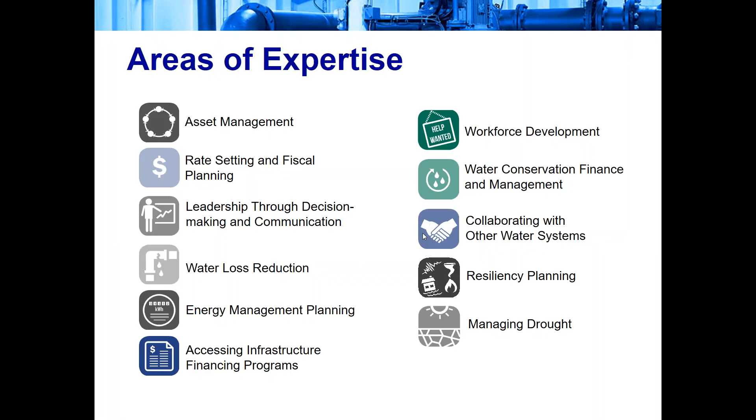Yeah. Well, thank you. Hopefully everybody can hear me, and we're going to get our screens transferred over. Is that looking good, Tess?

Okay. Well, thank you all. Just a little bit about myself. It's a pleasure to be speaking with you guys. Actually, as Tess said, I'm a career Fish and Wildlife Agency employee. Worked for the state of Texas as well as the state of Kansas, and then spent 16 years with the U.S. Fish and Wildlife Service in their headquarters in D.C. So I jumped at the chance. I'm a native Kansan and jumped at the chance to come back home to Kansas and get out of the craziness that's D.C.

There we go. Now we're getting advanced. So, yeah, I'm real excited, and to be honest with you guys, I'm real excited about this opportunity, the EFC network. Tess talked a little bit about it already, but as a former federal employee, I don't know of anything that we had similar in the Fish and Wildlife Service. We maybe did a little bit of similar type of technical assistance through our grants program, where we had some recognized experts that would work with the local folks, but to me, this is a great opportunity for you guys, and it's very proactive on the part of EPA to provide this type of training out to y'all free of charge and so forth and so on. As Tess already showed, these are some of the areas of expertise of the Environmental Finance Center Network.

If you haven't, I had not heard of us until I got hired on by Wichita State. It's a neat deal from my perspective.

EPA has an Environmental Finance Center in each of their regions, and we're university-based, providing a lot of technical assistance. You can see some of our specialties here. At Wichita State, we're known for asset management as well as finance and rates. So that's why we're here talking with you today about asset management.

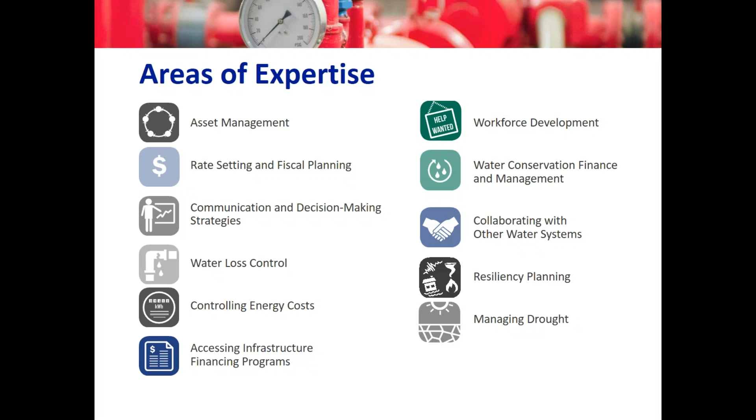So today's agenda, today's activities, I'm going to try and give you a quick overview on asset management and get you thinking about it, as well as get into some of the core components of asset management. Hopefully I won't bore you too much, particularly on the customer input part. That's one of my specific levels of interest.

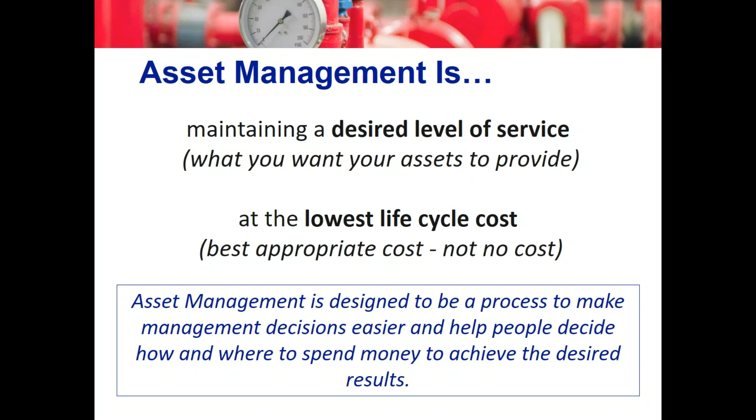So at the big picture, you've got a lot of things to consider when trying to run a utility effectively and efficiently, and you've got a lot of competing needs with limited resources. A good asset management plan is going to take these factors into consideration and help you or your organization make good, sound decisions on what should be funded.

So an asset management plan is going to look specifically at what your needs are and try to help you determine what the benefits are of a particular project, what the risks are of not doing the project, and the thing I really like is: what do your customers really want?

That is something this utility service industry has been kind of negligent about - or maybe not negligent, but a little lax in realizing that customers are a very important part of the process. Not only are they paying our bills, but it's important they're informed as to what it takes to provide water services and all the necessary treatments and expenses.

From my particular perspective, the more you get your customers educated and involved, the better off you're going to be as a utility.

Some other decision-making factors are going to be what financing is available, does the project meet a critical need, best expenditure of funds, and of course looking at the alternatives.

From my particular experience, I used to work in Kansas with Wildlife and Parks, and we used to be a comprehensive planning state, and these are some of the factors we were looking at. We made our employees submit this type of information every year as we were developing our internal budgets for some of our capital improvement projects.

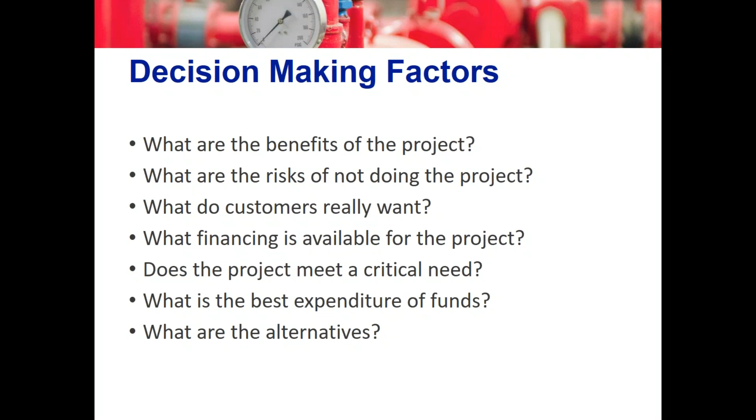So this particular guideline, or this particular slide, to me is very useful, and it's something you may be considering, or if you're not already implementing it throughout your budget process, this is something you might want to consider, because it gets kind of complicated running a utility. You're often faced with a lot of high-dollar, expensive repairs and maintenance that you need to figure out, and you don't know how to prioritize them.

So if you can come back to some of those questions, perhaps force you or your staff to take a hard look and answer some of those questions from the preceding slide, you can help filter out which of these projects are going to rise to the surface and be your highest priority.

From my particular example, I'm a native of the city of Topeka, our capital city in Kansas. It's a town of around 100,000, and last year they experienced about 1,000 water line breaks throughout the city. So if I was them and looking at my budget on this particular slide, pipe replacement may be where I'd want to place my money.

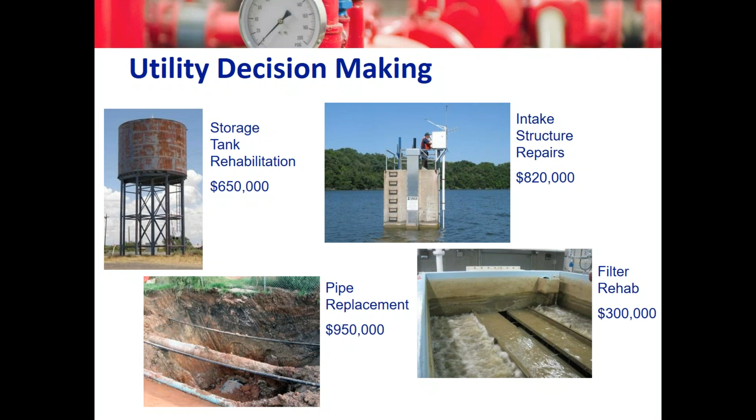But in reality, that particular example, they may actually have some more pressing needs to keep their water flowing. They can maybe replace the pipes as they need, but there may be something else, like the storage tank, that's the highest priority, and get funding for the pipeline replaced whenever they can. So if you go through that process and look at some of these issues, particular items are going to float to the top as what you need to be doing for good, wise use of your money.

Asset management planning, from my perspective, is pretty neat if you do it right. A lot of y'all on the webinar may be at the level where you're getting approached by contractors or consulting firms that want to do an asset management plan for you.

We go out and teach asset management planning throughout the state. One of our people that we teach with used to work here at the EFC, and she's since moved on to a different position, but before that she was working with one of our major engineering consulting firms here in the state, actually an international consulting firm. What she likes to point out is that yeah, her firm could come in and do a nice asset management plan for you, and it would be wonderful, state-of-the-art or top of the line.

But if you're not involving your staff in it, then it's just going to sit on the sideline and not get used. So to me, if your organization implements an asset management plan, it's neat because you need to rely on your staff. You're going to need to pick their brains, get their knowledge, get them engaged in the process, and in the end you're going to get a plan that's actually probably going to get implemented and used, and you're going to gain some of the knowledge of the entire workforce. To me, that's very, very critical in this whole concept of asset management.

Last week, just as an example, I think a lot of folks, particularly small systems, are finding that they think they have an asset management plan, but it frequently lies in the brain of their longtime operator. And that operator may or may not want to share that information to get it written down and shared with others, because the operator may be thinking that's job security in the long term, or maybe he's just swamped and doesn't get to it.

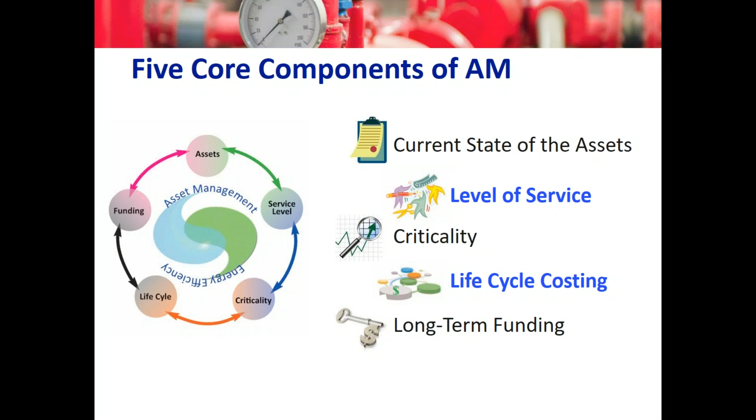And finally, the last component of asset management is to consider long-term funding. So with that, we'll jump in.

The first thing you need to do is start getting a state of your assets - learning what do I own, figure out what your system owns. Try to start getting that information collected and start easy. If you don't have an asset management plan already in place, we encourage folks, and your peers recommend, to start easy. If you're a wastewater utility, start with maybe counting the number of sewer manholes that you have in your system. Do something visible and just start easy and build from there.

If you're a public water supply and you've got fire hydrants and don't have a plan in place, start counting your fire hydrants and getting the location where they're at.

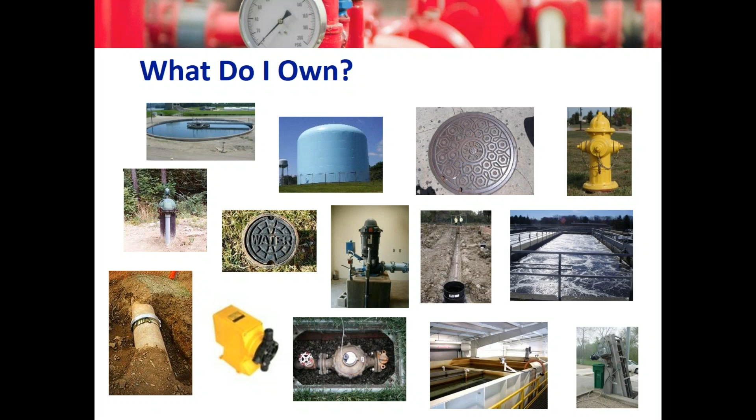I'll share an example of the city of Topeka - this is my hometown. This is some information they're sharing on their Facebook page - they've got an asset management plan in place, and it's a good system. Here's some information they're sharing with their constituents. They posed a question the day before asking: how many manhole lids do you think we have - true or false, do we have 20,000 manhole lids? So this is their response, and to me that's something you can do once you get an asset management plan in place - you can start sharing information with your constituents. As you can see, City of Topeka has 20,407 manhole lids.

So once you figure out what you have, then it's going to be important to know where your assets are. One of the things I really like to stress is you can start collecting your information and maybe just put it on an Excel spreadsheet. But if you get the chance, consider getting into a GIS database. GIS was just coming along back when I was initially in grad school in the 90s, but it's advanced so much in recent years, it's amazing to me. So start collecting the information and start getting it transferred to GIS systems if at all you have the chance.

Think about it - you may think of limitations where you don't have the chance, you may think 'I can't do it.' But I encourage you to think outside the box. One of the things we repeatedly stress is a lot of y'all probably have students going to college.

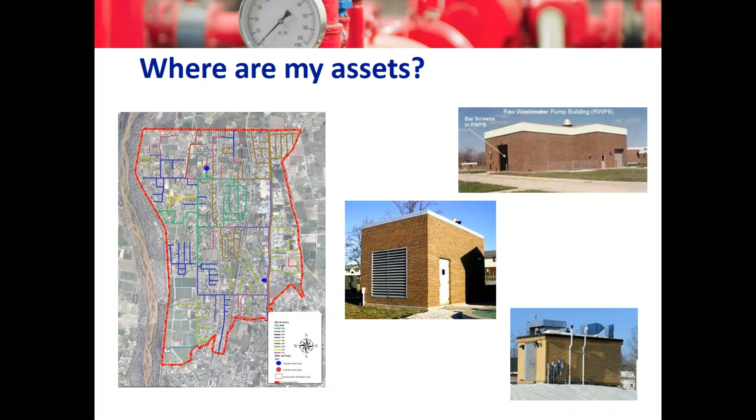So it's important to start knowing what assets you have and where they are, and then the next important thing to think about is the condition of your assets.

This particular slide is one we use in our training, and we like to get input from folks as they give their opinions. We particularly like asking, what's your opinion of the water supply pipe on the top left? It's interesting - we get some interesting feedback. Some folks say, hey, water's flowing, so it's great. Others say, hey, that's real poor quality, that needs to be replaced. But anyway, start to get a feel or an opinion as to what the conditions of your assets are, and that's some of the information you'll want to include as part of your asset management planning.

We suggest coming up with your own internal scale for your assets. It could be anything from a 1 to 5, a 1 to 10, or you can say fair, great, excellent. Whatever it is, whatever your staff agrees on - once you get staff buy-in on asset management planning and get their feedback, you can get their agreement on whatever the condition of an asset is and move forward.

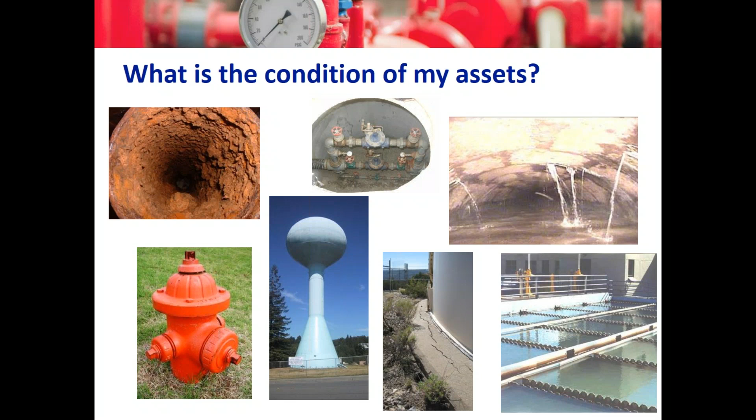Another example I like sharing is, once again, from the City of Topeka - this is their Facebook page from the utility department. They posed a question: does the City of Topeka have utility infrastructure from the 1880s? This is the response the following day: Yes, the City of Topeka does. They have infrastructure from the late 1800s - in this case, a sewer line underneath the main city. It really generated a lot of interest internally.

One of the things I did from afar was join a Facebook group called something like City of Topeka History Geeks. I shared their initial post and the response with that group, and it turned out a member of that Facebook group was one of the local reporters in the city. They ended up getting press coverage from the local newspaper, and I think maybe even the local TV.

That's the kind of stuff you can share once you get going with asset management planning. If you have social media support or a good communications department, you can start sharing that information with your customers, and it helps educate them as to what it takes to provide water and wastewater services in your city, and all the expenses involved.

I like to share with folks that before I took this position, I largely took water and wastewater services for granted. Boy, have I gotten my eyes opened and learned a bunch in the year and a half I've been here. I'm just amazed at what it takes to provide those services.

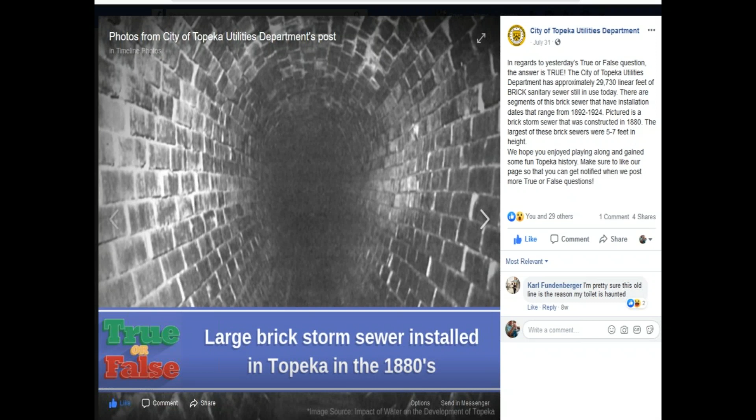I personally equate utility services a lot to the submarine fleet. I was up in the D.C. area for 16 years in my career and was around military folks there, so it seems very similar to me - the utilities are kind of like the submarine fleet. It's out there doing its job, doing its services, but no one really knows about it or appreciates it. That's some of the information I think you can share with your constituents once you start getting information on board and planning, getting going.

Thinking about this, still staying with your assets and what you have - another important thing you or your staff will want to know as you develop a plan is the remaining life of your assets. In some cases, if you're buying motors or have motors, you can rely on engineering estimates as to how long the motor should last.

You can always go back to some of your warranties and so on, but it's going to be important for you to start getting control of your assets, knowledge of your infrastructure, when it was installed, how much typical useful life is remaining, and start to think about that in planning terms as you prepare for future needed improvements.

To me, that's the most important thing with an asset management plan. I used to work in the budget shop here at the state level with the State Fish and Wildlife Agency, and it's important to keep that information flowing up so that your planners can help plan for the needed renovations and improvements you need.

So think about what is the remaining life of my assets. Then one of the other most important things becomes: what's the replacement value of my assets? What are you going to need? What's it going to cost to replace that motor, or to replace or rehab that water tower?

You need to start thinking about that, if you aren't already, in terms of planning, so that you make sure you have the funding available, and if you don't have it on hand, start looking for some of the funding sources.

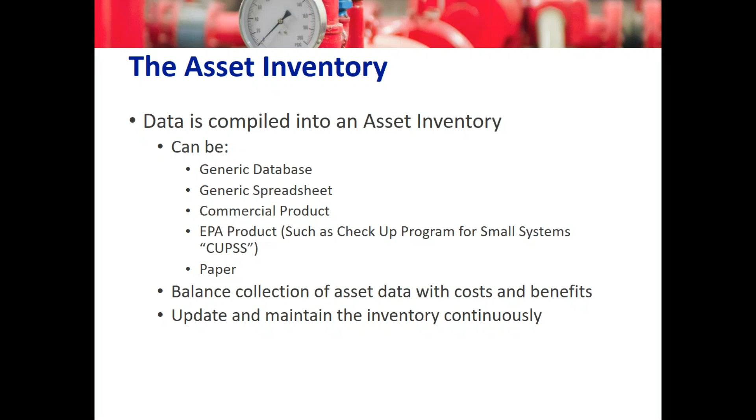We'd heard that it needed an upgrade, and EPA did fund some nice upgrades to it, so it's something you might think of and consider. I played around with it some here at Wichita State, and I think it's a good system and certainly worth promoting.

Now we'll switch over to the next core component of asset management: required level of service. That's the thing I could probably talk your leg off all day about, because that's my level of interest — one of my areas of expertise.

But it's very important, from my perspective, to keep communication flowing with your customers and get them involved in as many processes as you can. We get exposed to a ton of messages every day, and here are some ways you can keep information flowing to your customers — through bill stuffers, billboards, and classes.

Your CCR report, Consumer Confidence Report, is to me very, very critical. For a lot of systems, that's going to be the only outreach or education you really do with your constituents, and I really encourage folks to look at that and maybe improve upon it.

There are required things in EPA's documents as to what you need to include and report on, but I'd encourage you to make it very clear whether or not your system is actually in compliance. These are some of the things you can do if you're not already reaching out to your customers, and ways to start getting feedback from them on what they want.

If you feel comfortable with it, we encourage folks to involve your customers in as many of your processes internally as you can. In the next few slides, we'll talk about setting goals and measures for your utility, getting your customers involved and tracking that, letting them know. It will help them understand more about how your utility operates, and then perhaps use them to develop some measurable goals that you're going to track and report back to them.

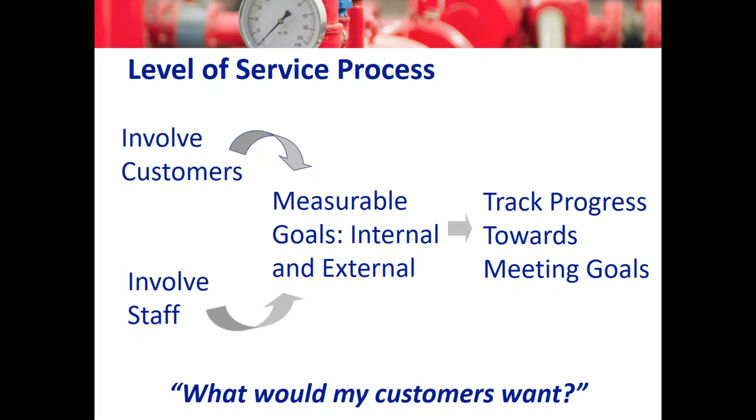If you do decide to set measures or goals for your utility, it's important to keep in mind that at minimum we must meet all regulatory requirements, but at the maximum, there may be services you want to provide, can provide, or are already providing that your customers don't know about.

The example here in the state of Kansas: we were asked by the state to go work with two water systems that were considering combining. Here in Kansas we have declining populations, particularly in our rural areas, and the state was hoping a rural water system would combine with a small city. So they had us go facilitate a meeting, and one of the key factors ended up being where they decided not to join resources and consolidate into one water supply plant.

The reason was the rural water folks did not soften their water, and their board members honestly said their cows don't care if the water is softened or not. The water system of this small community was actually softening the water, which is a big benefit for their customers. So the additional cost of the water softening ended up being why they didn't combine.

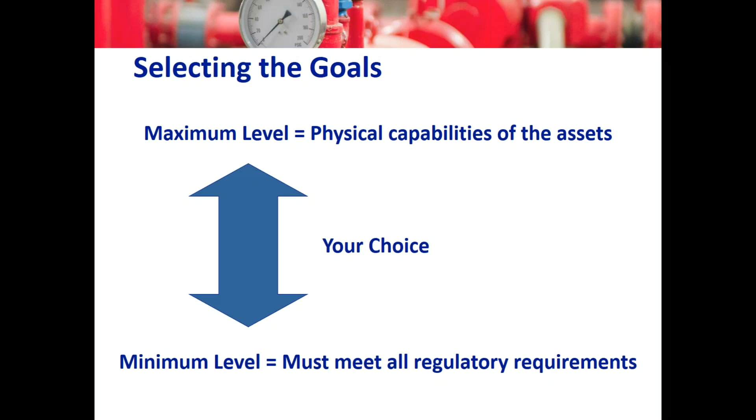It was great to see that both boards represented what their customers wanted and needed, and they knew about it. So it's neat to know that the organizations, in that case, knew what their customers wanted, had them involved in the process, and then ultimately chose not to combine resources as a result.

Just real quickly, we like to share some goals for you to think about. These are things that, as we talk about goals for your systems, we think are important, and things that you or your constituents may not know. Here in Kansas, a lot of our systems try to...

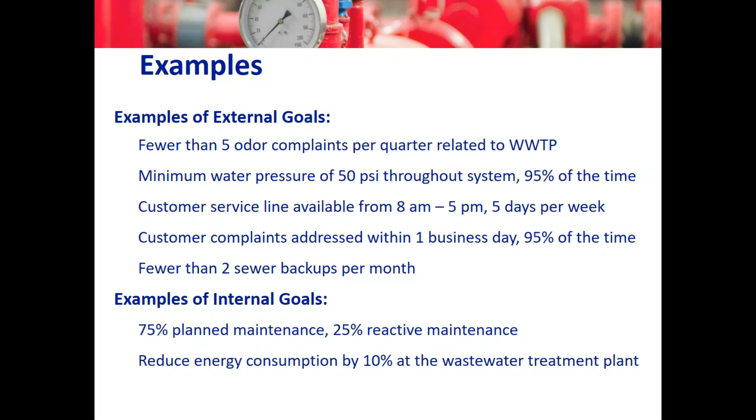...maintain water pressures around 50 PSI. But as we travel throughout the state, we're learning of systems that are actually maintaining 70 PSI, and we've even heard of one nearing 100, which the constituents may not understand all the costs associated with. So these are things that the more you educate your customers, the more you let them know what it takes to provide your services, the more they can have influence on the future operations of your organization, and that may help you factor in on some of your decisions about which pieces of infrastructure you replace and which are most important.

So we'll switch over next to the next important topic, which is going to be criticality and what components of your systems are critical to work with.

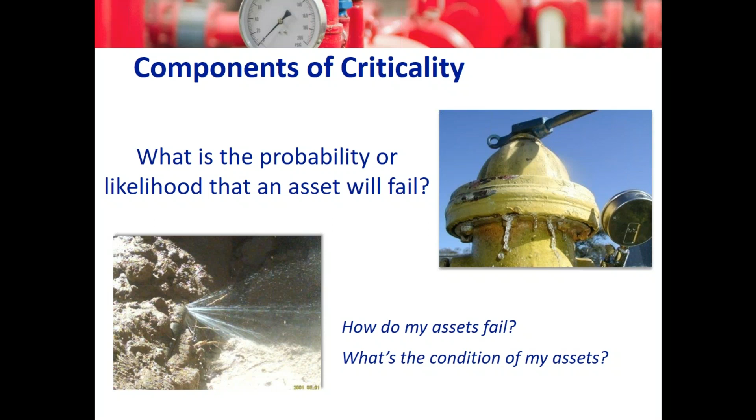Like I mentioned already, some parts of your system are going to be critical, and make sure you have backups if there's perhaps supporting hospitals, schools, so forth and so on. You're going to need to know internally what's the probability and what's the risk if an asset fails.

Here's some of the things that happens. You have water line breaks. You can put a lot of people out of service for at least a short term.

Are there legal, environmental, or social consequences if you're not maintaining your system properly? I should have an example here in a couple of slides from the state of Louisiana that will show some of you the importance of the decisions that you are making.

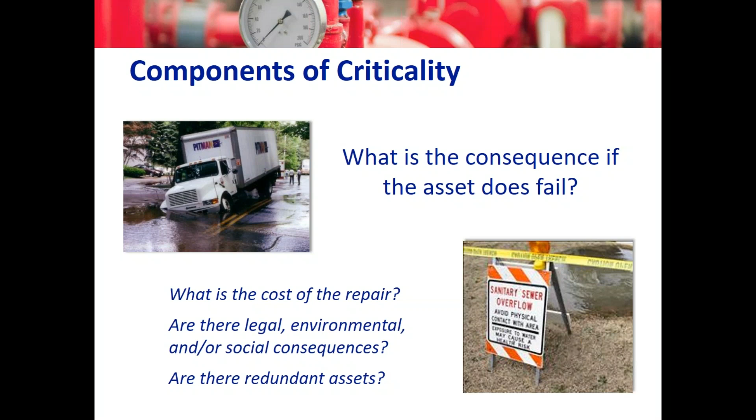So one of the things we encourage folks to do is graph out, graphically represent or look at your key infrastructure components and figure out what's the risk, the probability of failure, and what's the consequences of failure of a lot of your key pieces of equipment or infrastructure.

And if you end up determining that some of your infrastructure is high risk, if it goes out, if that pump or that system that's supporting the hospital or jail or prison goes out, then that's a high risk. You're affecting a lot of people, and that particular area needs to be more focused for you.

What we like to talk about is low risk. What's the risk of, say, a sewer line in a cul-de-sac that may fail, and 20 residents are affected out of a town of 100. Well, the probability of failure in that particular case is probably going to be low, and the consequences of failure are going to be pretty low.

So we encourage you to look through at all of your infrastructure and just try to give an honest assessment as to what's the likelihood that the piece of equipment will fail, and what's the consequences.

That will also be critical factors then for you to determine where to put some of those key financial resources that you have. Because as we all know, our resources are stretched financially, and it's going to be important for you to have a good, honest assessment as to where to put your money and what particular pieces of equipment rise to the top of the heap, the cream of the crop, for replacing.

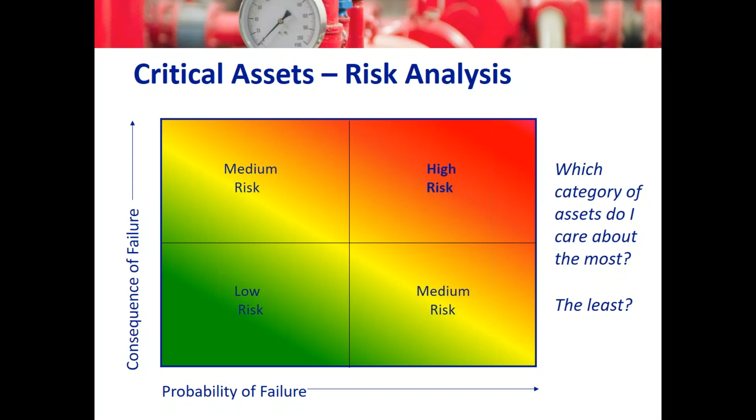We've talked a little bit next. We'll go on to the next key component of asset management, and that is life cycle costing.

There's a little bit of an art here and a little bit of a knack here, but it's important to know what are the ramifications, and particularly what are some of the things you need to consider with life cycle costing. As we talked about already, there may be legal ramifications, there may be environmental ramifications if you're not maintaining your equipment and it fails.

As a fisheries biologist, I can tell you there's been some very high-dollar fish kill mitigation efforts when folks weren't maintaining their systems, and you had large fish kills in some of your rivers and streams. Legal ramifications.

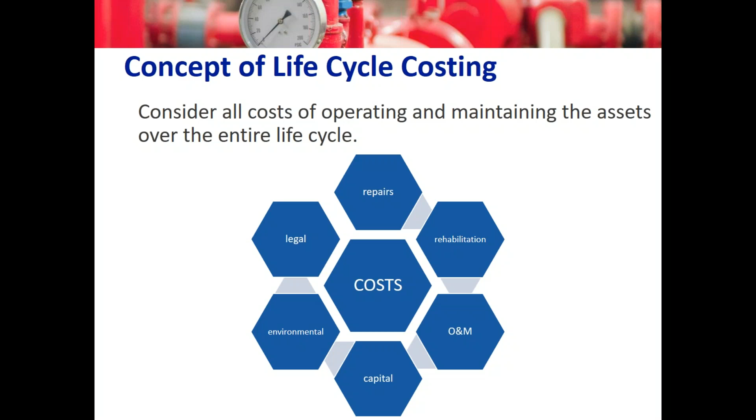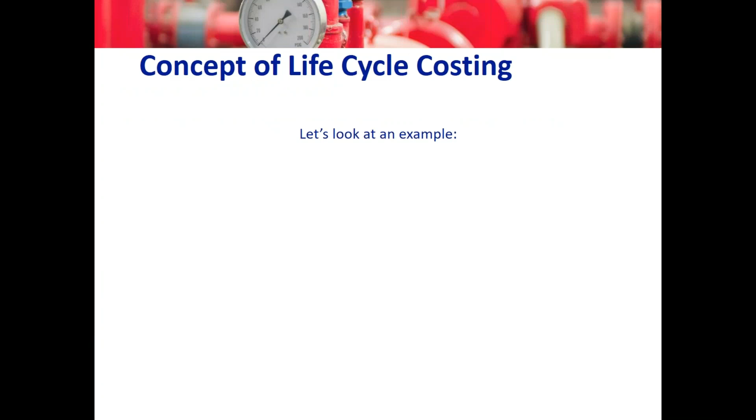So the concept of life cycle costing - we're going to look at a couple examples here. We've got two different ways to operate a system. On the left, we're putting more money into repair costs and trying to keep things maintained, and it looks like it's going to be more expensive. That may be the case in these days and times where folks really don't want to give the budgets needed to maintain things, and would prefer a budget more like the one on the right, where the initial costs are the same, but your boards and councils are not approving the maintenance funds. It may seem prudent, it may seem cheaper to go with that option, figuring things are just going to work, you don't need that much for repair costs.

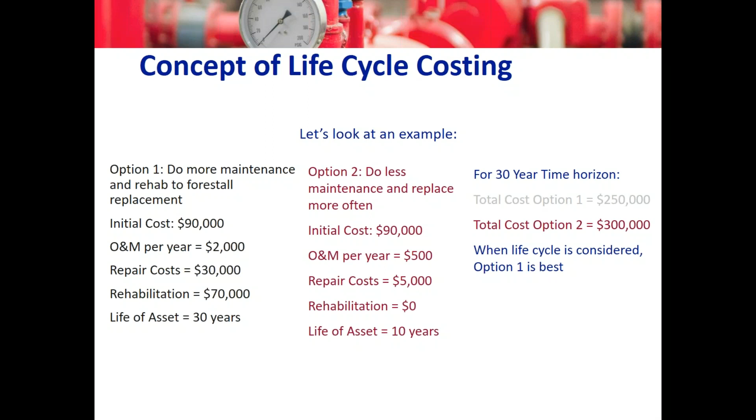But in the end, if you really factor things out, the cheaper option between those two is option one. We encourage folks - I see we have a mayor or two on the list of registered participants in today's class - think about that. Get honest feedback from utilities, or if you are the utility, make sure you're providing your board with good estimates as to what it takes to run your systems and what your repair costs are, and hopefully you'll get that approved by your board and council so your system keeps running well. I said option one is the most economical - you may have different results, but do this analysis and give your board and your utility the best answer.

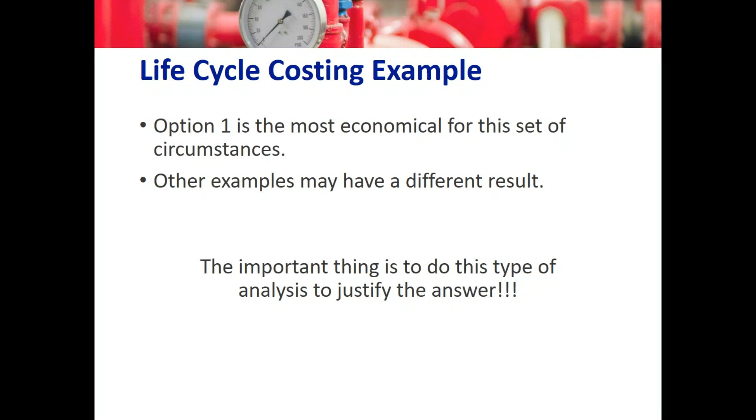Routine life cycle costing and O&M - it's important that routine and preventative maintenance can help extend the life of an asset quite a bit. There are neat things you can do to extend the life of your sewer lines and so on, just by doing good, proper maintenance - making sure the lines are televised so you can see root intrusions, making sure oil gets changed on key pieces of equipment, and so on. It's important that your maintenance dollars are being spent properly, and that your staff is out maintaining what needs to be done at the proper time. Once you get a good asset management plan in place, things will flow, and hopefully your maintenance schedules will be appropriate with a good end result.

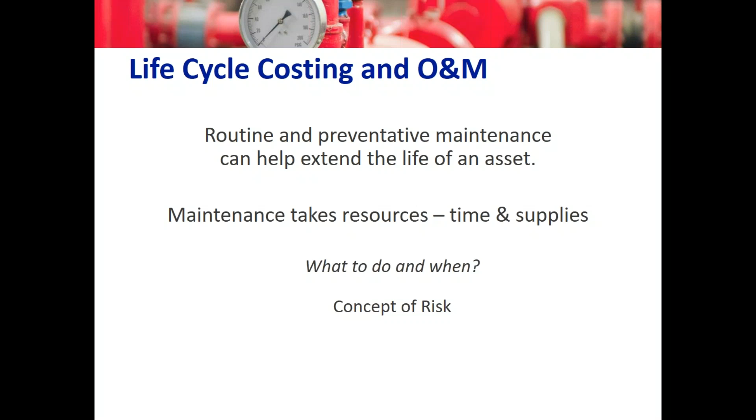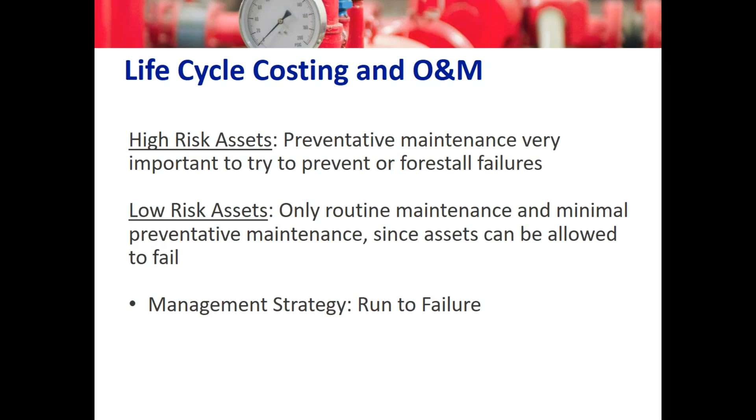Continuing with life cycle costing - think of your high risk assets. Make sure they're getting the preventive maintenance needed to try to prevent or forestall failures. Nothing's worse than when your key pump goes out and your whole city loses water pressure, or your key water supply line doesn't get maintained and breaks. Your whole city may nearly run out of water. We had a fellow EFC member on contract who was the ex-City of Wichita's main water treatment plant operator, and they had that happen - one main water supply line coming in from Cheney Reservoir north of town broke. During his tenure, he got it fixed just in the nick of time, but we almost had 300,000 people going without water in the city. So think about life cycle costing, and make sure your funds are devoted to the key pieces of equipment. Here are some good guidelines from your peers as to where your money should go with your maintenance budgets.

The recommendations of your peers are that extremely important, high-maintenance pieces of equipment are probably going to get about 45% of your budget. The less important things, like a water supply line to a cul-de-sac serving 12 to 15 people, are where you want to spend a little less of your maintenance funding. This slide is a good example from your peers of where you should be devoting funds to keep your system in good shape.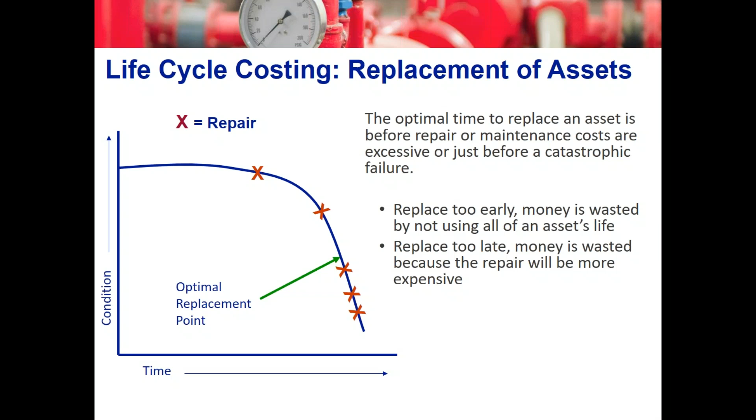At the field level, in actually implementing this, we recommend you do the best you can. Track your maintenance records, look at what maintenance costs and what it costs to replace things, and figure out whether to repair it one more time or go buy a new one. Keep that in mind.

Keep this type of graph in mind when deciding when to replace things. It's not possible to know the optimal time to replace every asset, but use your staff's knowledge and do the best that you can.

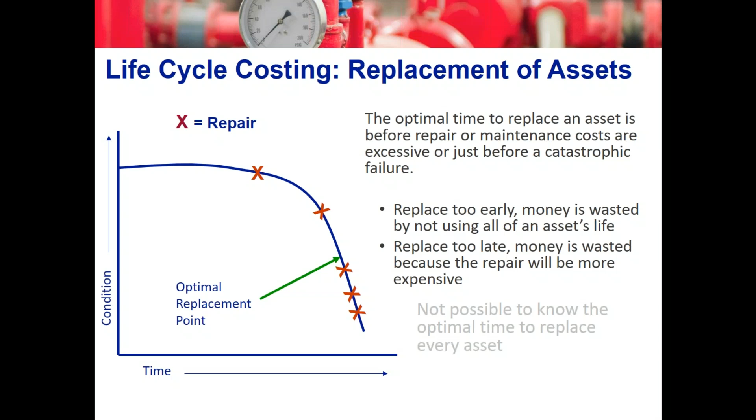The other thing we like to talk about, which I really like, is that a good asset management plan looking at all these factors helps with capital project planning and validation. Here at Wichita State, we teach a class or workshop on capital improvement planning, and if you don't already have one in place, we really encourage you to do it.

Looking at the participants, the larger utilities probably already have this in line, but some of the small ones may not. If you don't have a capital improvement plan already being developed, we really encourage you to do it.

With our small systems, often it's just the lead operator and the city clerk sitting down to hash things out: where are we at with this pump, when's it going to need replaced, what's it going to cost. You can start getting the core or foundation of a capital improvement plan on the books and start budgeting to make sure you have the funding available.

Ideally, a capital improvement plan looks 20 years out, but realistically it's more commonly a 5-year time frame. Keep that in mind, and remember that projects will bubble up to the top one year, and next year the priorities will be different.

But as long as you're thinking about what you need, what your systems need, and letting your boards and councils and everyone else know what you need, and trying to gain their support, it's important so that you can keep your system running with as little hiccups as possible and keep that service as reliable as possible.

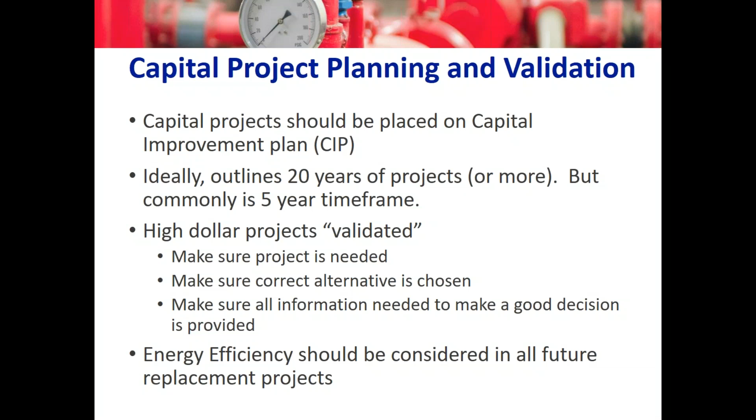From our perspective, we think, and we may be wrong, but we kind of assume energy efficiency has been really stressed for 10 years or so, so we figure a lot of utilities have made great advancements with it. But if you are considering energy efficiency, it is something to also factor into your asset management plans if possible.

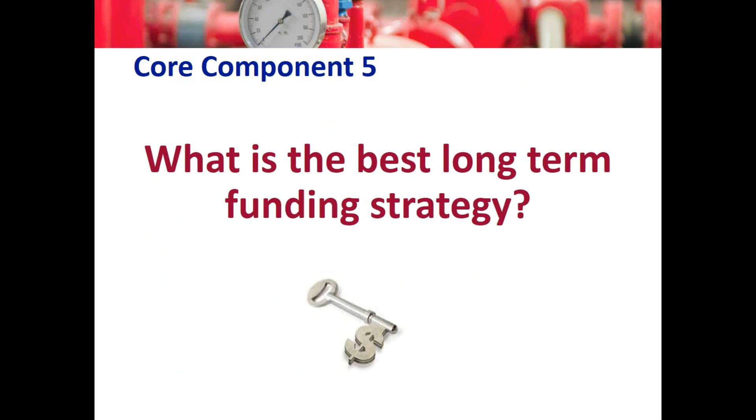And these are some of the things we talk about - typically the most important factor is customer rates. But we do from time to time hear of systems making quite a bit of money off customer fees with water shut-offs and shut-ons. Some water utilities will get a decent income that helps them on impact fees. And of course, most of your utilities will have the taxing ability, so that's a big advantage for you guys.

If you have not already done a recent water rate analysis, we really encourage you to do that, because that's another important component of asset management planning running on in the background. It's just taking an honest look at your financial resources and figuring out where to go next.

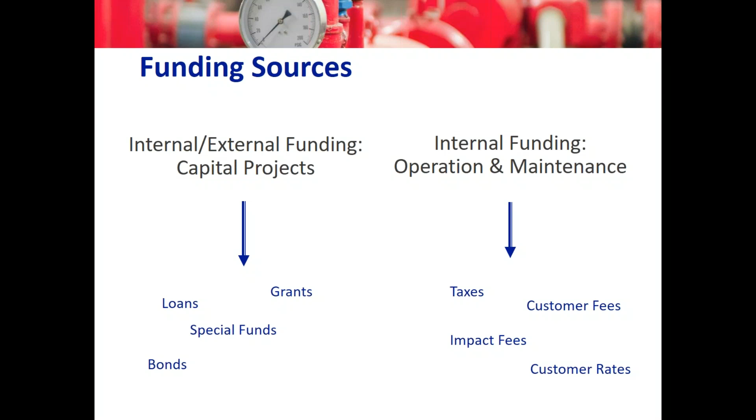That is something we can potentially provide here at the Wichita State EFC, as well as maybe some of your other EFCs. From my perspective, it's great because EPA is giving us funding, not limitless, but we do have funding where we can potentially go out and help small systems and provide various services. So rates are an important part of funding O&M, as we all know.

If possible, rates should be fair, equitable, and cover your full operating costs. What we're finding is that a lot of communities or water utilities haven't had water rate increases in a few years, so they're kind of getting behind. They need to do an honest evaluation of what it costs to provide their services, and also make sure they're getting some money stuck into the reserve accounts.

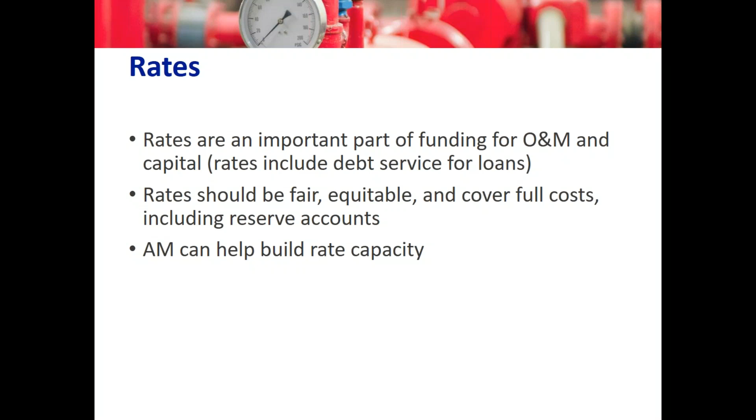So asset management is a strong tool to help you build that capacity. If you get a good asset management plan developed that lets you know what your future needs are versus your current ones, and factor all these things in together, you're going to have a good running system.

And to tie this all together a bit more, from my perspective it's always important to make sure you're reaching out to your customers and informing them as to what it takes to provide the services, as well as making sure you're reaching out to the board, your mayor, or whoever your oversight is. The more information you can provide those folks, the better off you are.

In the end, it's very important to get everyone on board so that you can get rate increases that are easily supported by everybody - by the elected officials, by the boards, by the customers. So the more information you put out with your constituents, the more information you have to generate that supports your decisions.

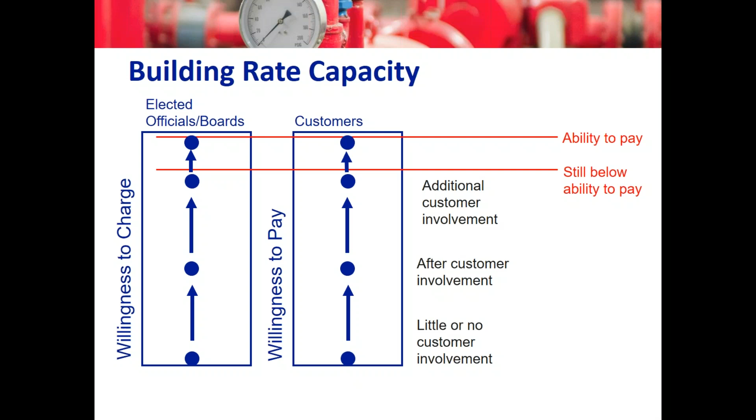The management plan saying, we've looked at our assets, these are things that are failing, these are things that we need, these are the services we want to provide. The more information and educated you have everybody involved, the more likely you are to gain support for what you need to run a well-running system.

And so finally, you're going to get to the asset management implementation. Some of you on the webinar may already be implementing asset management plans, a lot of you probably aren't. And the advice we have is where to start. We've already talked about it. Start anywhere. The main thing is to get started and try to build from there.

We all have time limitations and lots of responsibilities on the table, but try to take the time to get started, be it counting the manhole covers, be it counting your fire hydrants, whatever, wherever you can start. Start slow and start building, and then see where it leads you to.

In the end, we think you'll get a good system that will help make sure that you're providing the water and wastewater services reliably and as efficiently and effectively to your constituents as possible. So that's in general where we're at. You're going to see more and more interest and focus being placed on asset management as a result of the America's Water Infrastructure Act. Certainly in the state of Kansas, as well as throughout the country, you're going to see more and more focus on that. With that, we'll start wrapping up the presentation.

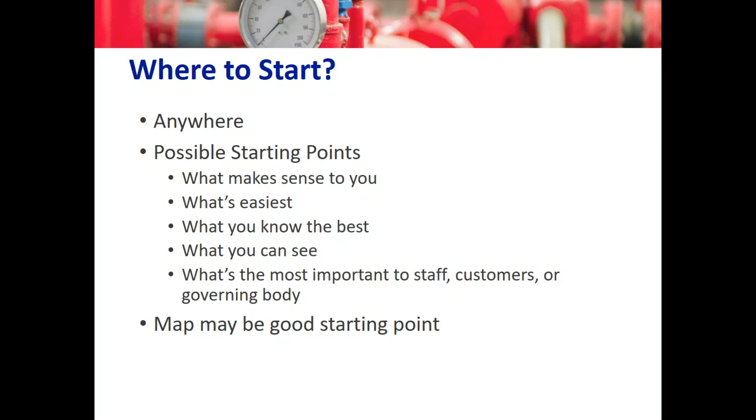Asset management, as I told you, both Wichita State and the New Mexico Environmental Finance Center are well known for asset management planning, and here in the state of Kansas, we get significant funding from the Kansas Department of Health and Environment to go out and teach it throughout the state. So it's been my privilege to share this information with you all today.